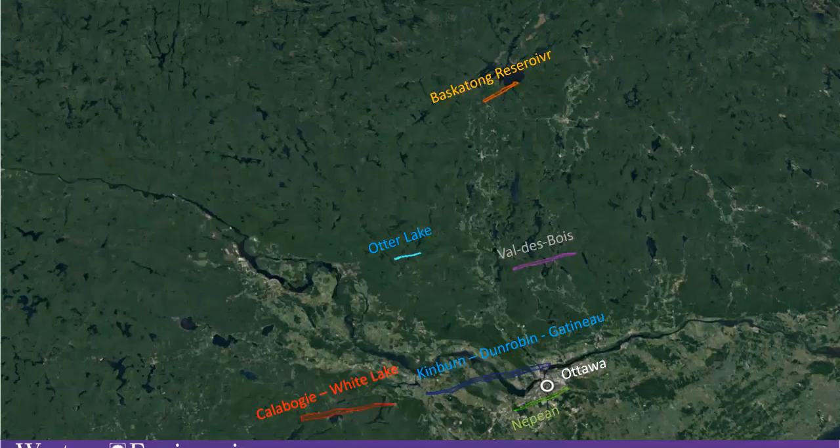So here is a brief summary of the events. On September 21st, the Calabogie to White Lake tornado was not confirmed immediately. From a Northern Tornadoes Project ground survey, we believed it was likely that the tornado touched down. It was confirmed on September...

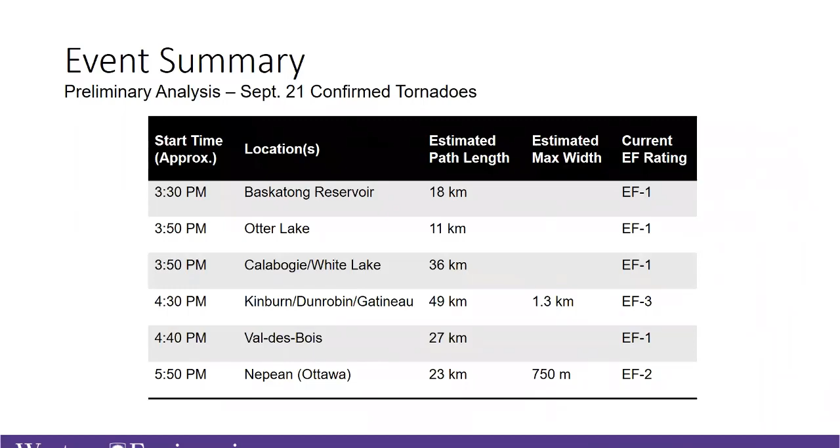I'll now go over some of the meteorological details that have been provided to me courtesy of Leslie Elliott, a meteorologist on this project. Here are some of the meteorological conditions surrounding the event. From the Upper Air Storm Prediction Center mesoanalysis, there was ridging approaching upper troughs and upper level jets causing a favorable area for enhanced lift.

Additionally, the Weather Prediction Center tracked low pressure throughout northeast Ontario, resulting in warm, moist, southerly surface flow for most of southern Ontario and southern portions of Quebec. Behind the warm front, by 5 p.m. local time, the cold front moved through eastern Ontario and southern Quebec. These conditions created lift mechanisms.

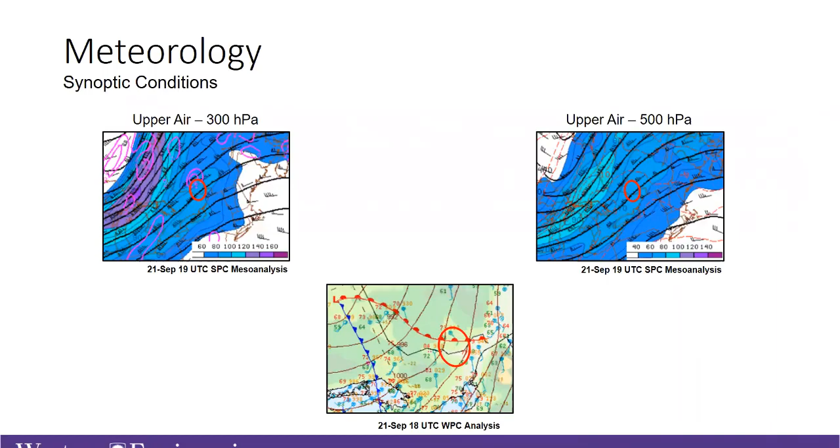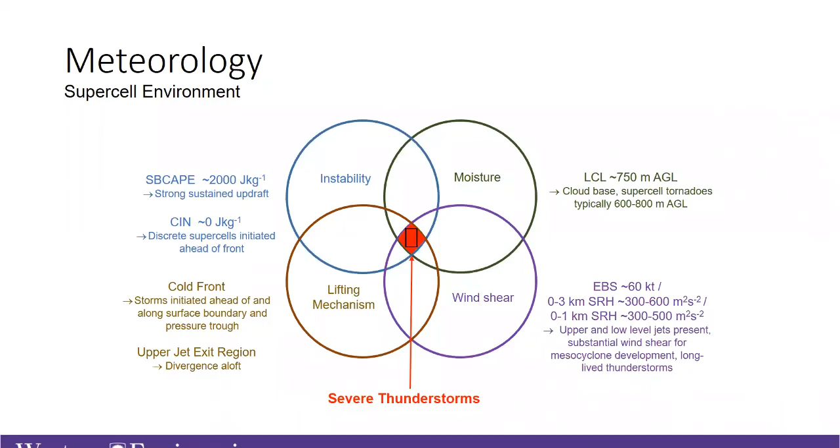So there are four main ingredients to a strong supercell environment. These ingredients, as seen in the figure, are instability, moisture, lifting mechanisms, and wind shear. As described in the previous slide, there were great lift mechanisms. The instabilities and wind shears were remarkably high that day and higher than expected. These conditions created ideal circumstances for the creation of supercells.

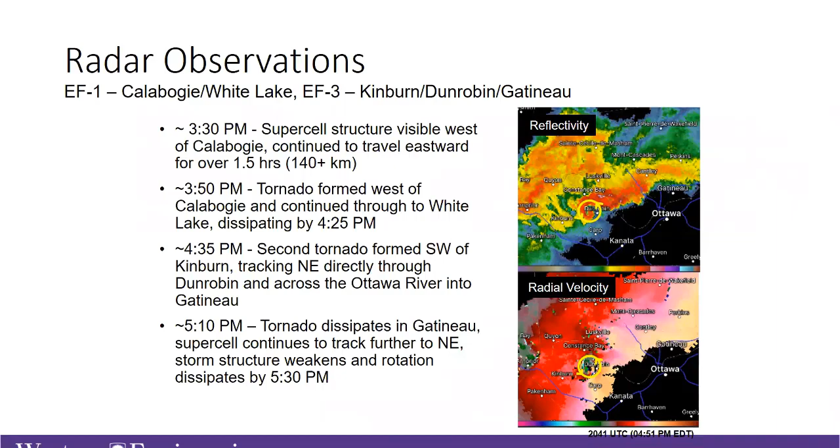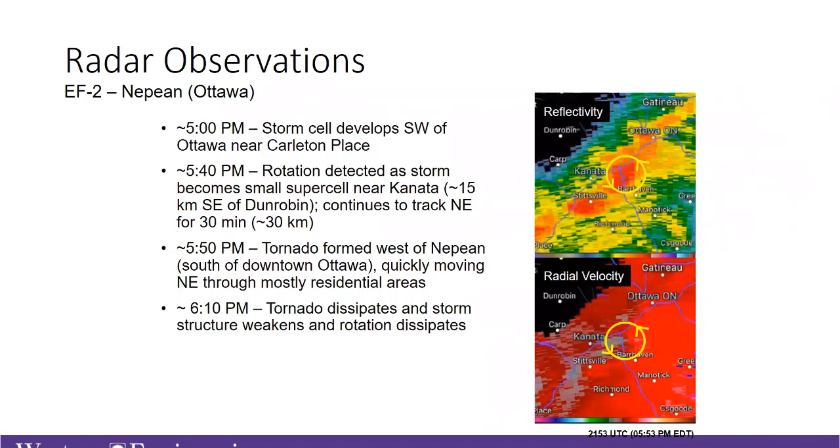The second tornado formed southwest of Kinburn and tracked northeastward across the Ottawa River into Gatineau, finally dissipating in Quebec. The Nepean system occurred around 5 p.m. The rotation was detected as the storm became a small supercell and tracked northeast for 30 minutes. The tornado formed west of Nepean and quickly moved northeast through the mostly residential areas and dissipated around 6:10.

So Environment Canada forecasters issued warnings of potential severe weather prior to the event. This included special weather statements and upgrading to a tornado warning throughout the day. Supercell tracks were followed through eastern Ontario and southern Quebec. The storms lasted from 3:30 to 6:10 p.m. There were over 23 people injured, with 5 in critical condition, and 2,000 plus dwellings were affected. Significant damage to electrical infrastructure resulted in 261,000 people losing power.

The damage experienced in Ottawa is some of the worst experienced in recent history. City officials compared the tornadoes to the 1998 ice storms that caused 5 million people to lose power and cost $1.1 billion in damages. From our personal experiences traveling to the area, many hotels and businesses were without food or power, and traffic lights were also without power throughout the Ottawa area.

Although there has not been an officially recorded number of insurance claims, the provincial government has made $2.7 million available for victims, and the Red Cross has provided an additional $1 million for temporary assistance in the form of shelter and food. Following the storm, there were 16 calls of people being trapped in their homes or in vehicles.

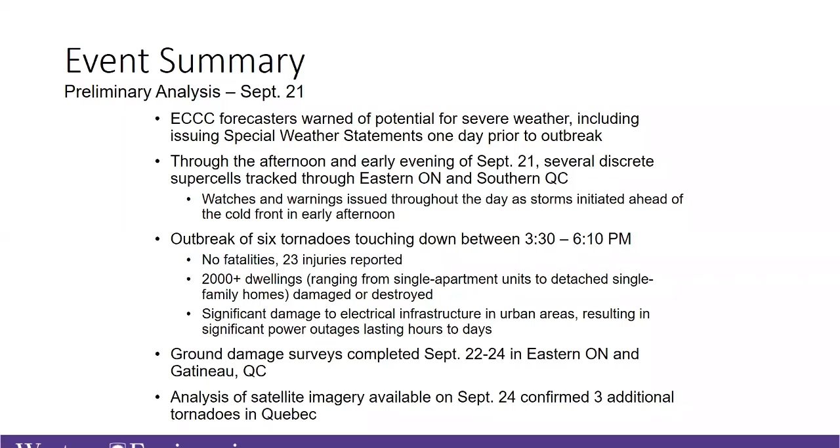Ground surveys were conducted in the area from September 22nd to 24th in Eastern Ontario and Gatineau. Additional analysis of the satellite imagery was available on September 24th to confirm 3 additional tornadoes. So one of the purposes of our damage survey is to estimate the wind speeds. For those unfamiliar, this process is unlike hurricanes. Tornado wind speeds are determined forensically.

In a hurricane, equipment can be set up prior to the event, and this is able to measure the wind speeds for the event. For a tornado, this is not done due to the difficulties determining where and when the tornado will hit, and the determination of wind speed is done following the event. Following this event, we examine the damage to estimate the wind speed and categorize the damage. This is done using the EF scale. This scale gives damage indicators and the respective degrees of damage. This allows an estimation of wind speeds.

For this damage survey, the Northern Tornadoes Project sent two teams. One team consisted of meteorologist Dave Sills and Leslie Elliott. David Sills works for Environment Canada, and Leslie Elliott is a meteorologist working for Western, embedded in Environment Canada. Aaron and I are both engineers from Western. We were also joined by a team from the Ontario Storm Prediction Center, consisting of 5 members, and the Quebec Storm Prediction Center, with a team of 3.

The Environment Canada teams focused on determining the track length and width of the storm. The Ontario team mostly focused on the Ontario portion, and the Quebec team observed portions of the damage in Ontario before examining the eastern bounds of the storm.

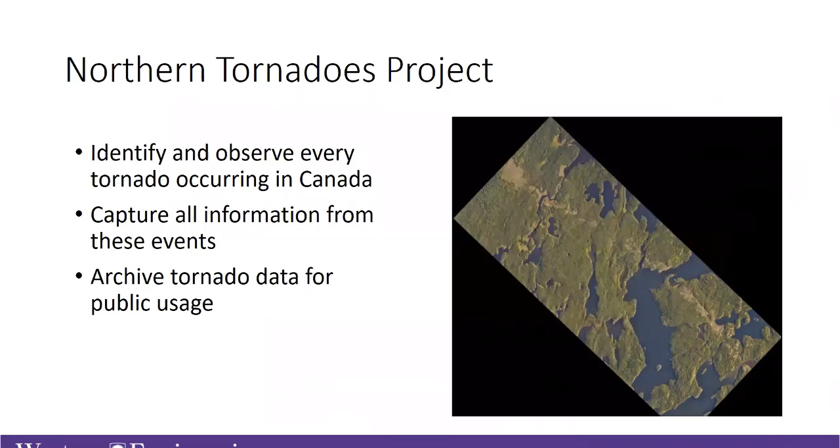So currently only the ground survey has been performed for the Ottawa tornadoes. The aerial surveys have been delayed due to weather conditions and aircraft availability. The Ontario ground surveys were conducted September 22nd to 24th. This survey was to estimate the bounds of the tornado and assist in determining the areas for the aerial survey, determined by finding the thresholds of damage from the storm.

One of the objectives of the ground survey is to capture everything that can be seen from the ground. Ideally, this means going door to door and examining every single structure affected by the storm, including noting structures that were not damaged. This needs to be done as soon as possible following the event due to the immediate cleanup that follows.

Ground surveys also allow us to talk to residents and clarify details, such as determining the context of damage. Sometimes these are just repairs on a building that were being undertaken, or determining if there were wide openings in the building, such as a garage door left open or windows.

With the ground survey, we want the finer details of the damage as well, including examining the connections that would fail and the quality of construction. Where roofs have come off, these connections are used to determine the strength of the building. Small details on buildings allow us to determine if the construction quality was poor, average, or well constructed.

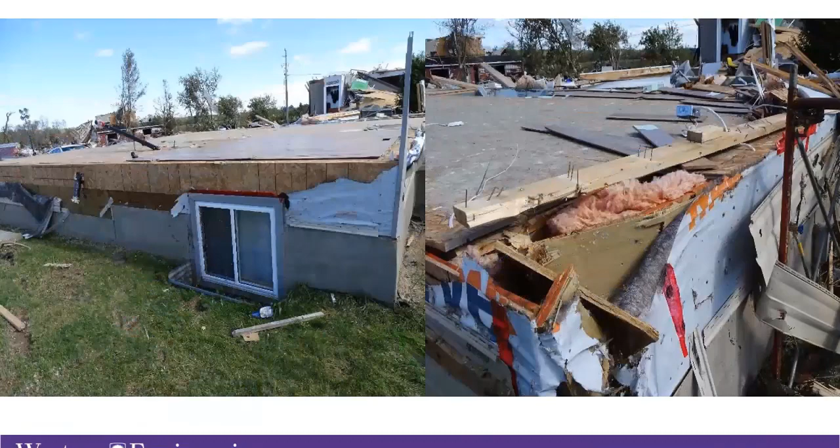Some of the vinyl finishing of the flooring was still present on the building. This is not a good sign for the construction of the building. It appears as though the walls were held by a few nails. Overall, this construction was lacking.

The walls appear to have come down completely with the poor nailing, and parts of the vinyl siding are present on these walls. If we examine the trees in the background, we'll notice these trees still have leaves and branches. You can see parts of the vinyl siding hanging in these trees. Many of these trees are still standing after the storm.

The nails here do meet the code requirements to go through the plate, subfloor, and joist. However, compared to the strength of the minimum requirements for anchor foundations, the nails have roughly up to a tenth of the uplift resistance and a third of the shear. The wall sheathing here does not span across the bottom plate joint, which further supports that this building is a below average to average structure.

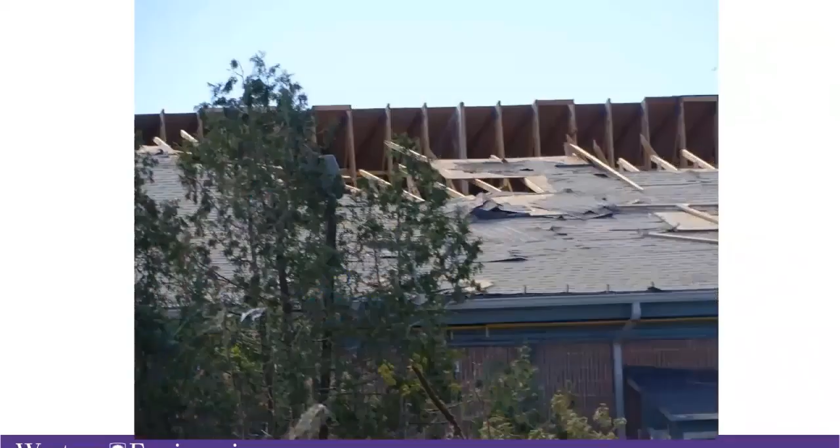Nearby, the church on the main street has experienced damage to the top of the roof. The top peak of the church has been damaged. It's a stranger case since most of the shingles are still intact, however there is significant sheathing damage and damage to the trusses.

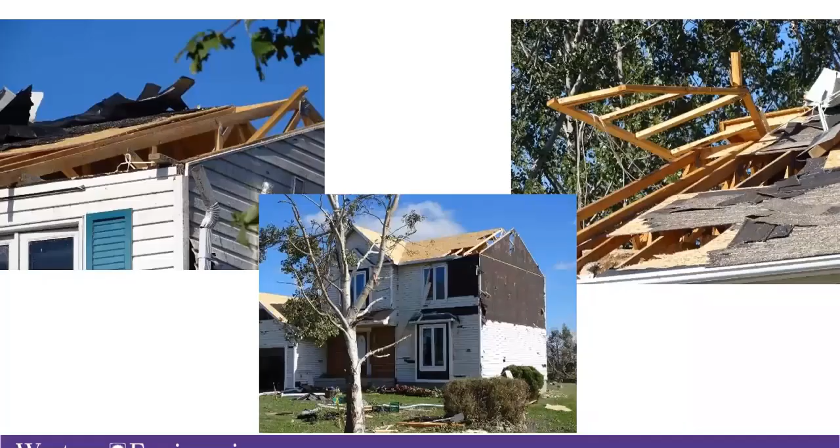I'll move further downwind now to the observations found towards the back end of this community, circled here. Here are three different pictures of houses in the area losing sheathing. These images show three different homes with high degrees of damage. The top right image shows a truss coming off the roof. There were less debris effects on these buildings, but more significant shingle and siding losses.

This image is a particularly interesting building case. From the street, this building only appeared to lose shingles on the top roof. However, speaking with the homeowners, this building has been shifted off of its foundation. It will have to be rebuilt since it's not considered stable according to building inspectors. It's difficult to see this damage from the outside.

I'll be passing off the presentation to Aaron now to talk about our findings in Gatineau and Nepean.

Thanks, Emilio. So Gatineau, Quebec was another severely damaged location from the outbreak that was surveyed by our team. This damage was caused by the same tornado that swept through Dunrobin, which then crossed the Ottawa River and hit Quebec. This map shows the approximate path of the tornado in red, with Dunrobin in the center of the path and the Quebec portion at the east end in the black circle.

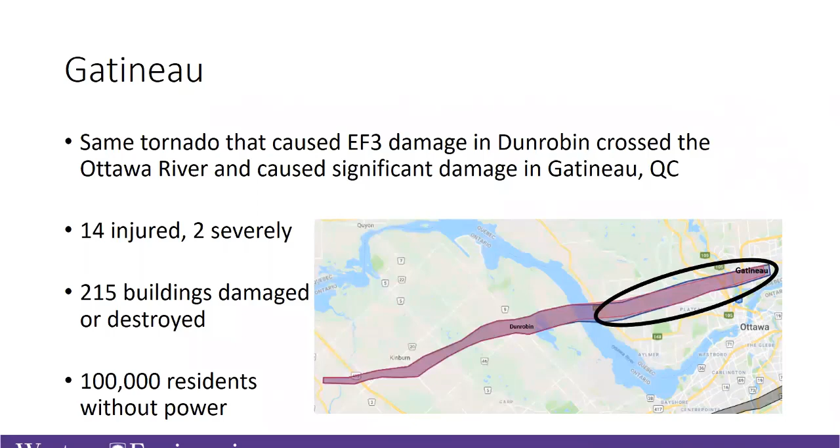Thankfully, much of that circled section was rural land. However, the Mont-Bleu neighborhood was hit hard at the east end of the circled section, which is where we surveyed. There were no casualties, however news sources stated 14 people in this area were injured from the storm, with 2 in critical condition. 215 buildings were damaged or destroyed, with hundreds more affected. There were also up to 100,000 residents on the Quebec side of the border without power for varying lengths of time.

Our team estimated that this was low EF3 damage, with maximum wind speeds around 240 kilometers an hour, which is in general agreement with the numbers Environment Canada gave. On the following slides, I'll take you through the various damage we observed in the area.

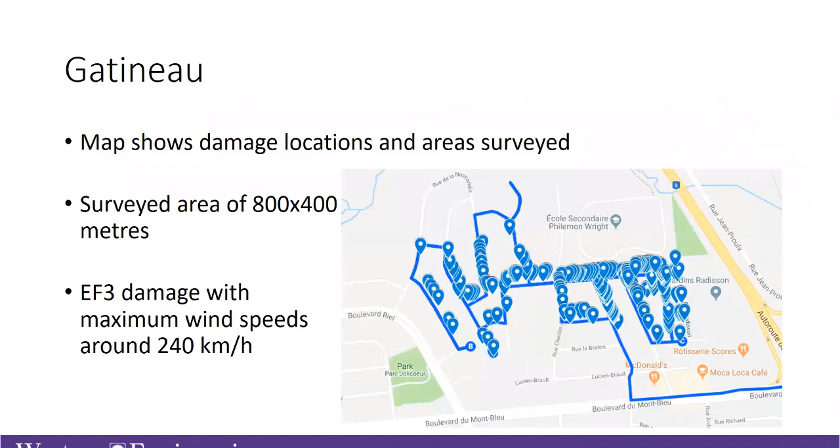The most common type of structure damaged in the area was low-rise apartment buildings. Before I go over each area of damage and building type, I'll go back to this map and highlight the area we're looking at with a red box to make the presentation easier to follow.

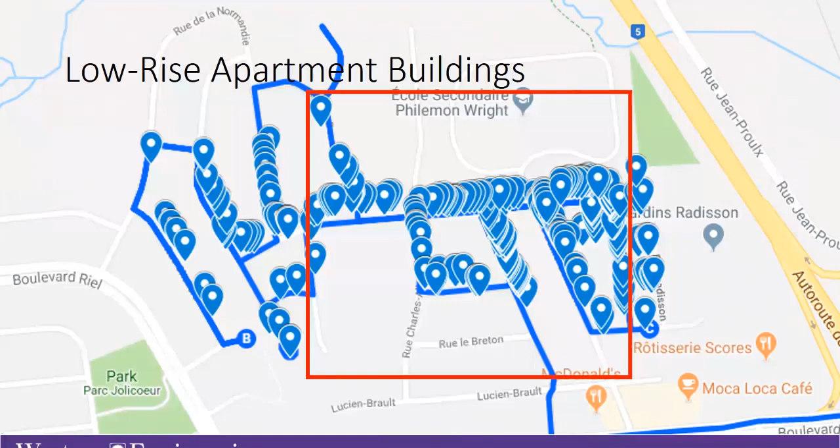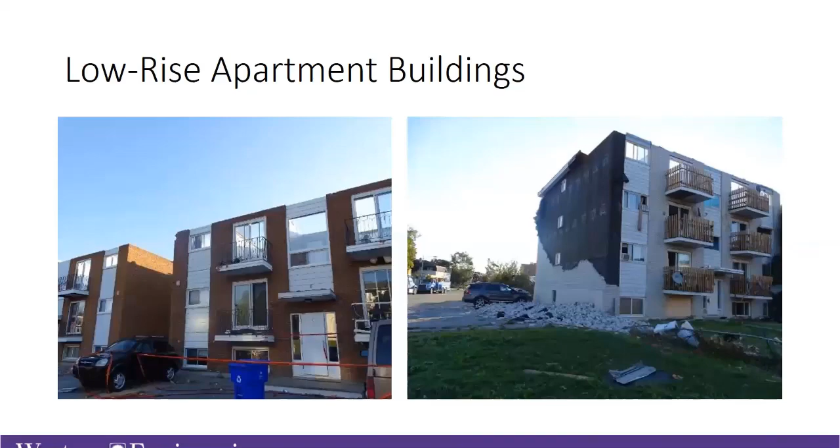removed. Although this is less obvious with photos of flat roof structures from the ground, you can clearly see that the roofs are missing when looking through the windows on the top floor of the structures. Once removed, these roofs break apart and turn into dangerous projectiles in the debris field, damaging more structures downwind. The fact that these structures were located at the bottom of a hill could have played a role relating to debris impacts as well.

Many structures also had external walls collapse in their top floors. This mostly happened to corner walls on the windward side of buildings, like in the photo on the left. The photo on the right shows a building that actually had its entire back wall of the upper floor removed on the leeward east-facing side of the structure. You can tell we're looking at the leeward side by noticing the mostly intact windows.

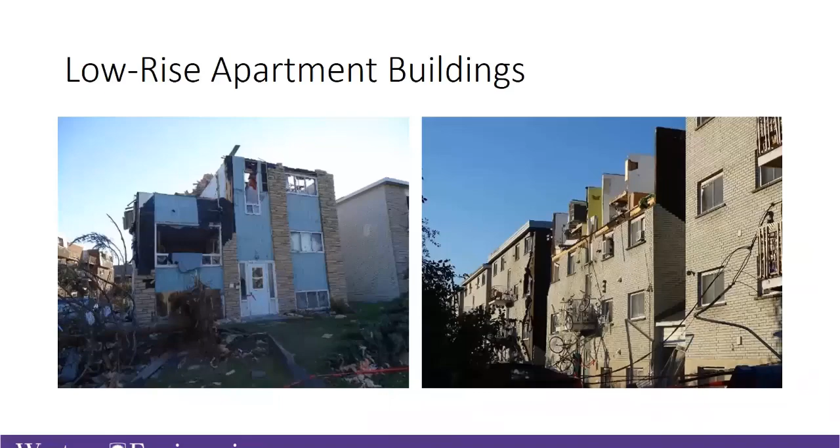This is a sign of how strong the winds were, or perhaps faulty construction, if this wall was not properly secured to the rest of the structure. This type of damage was the most severe in the area and was a main factor towards the decision of an EF3 tornado.

This is not surprising, as much past research has shown hip roofs to be stronger than other roof types due to their aerodynamic shape and roof-to-wall connections on all four sides of the structure, as opposed to gable roofs, which only have roof-to-wall connections on two sides of the structure and not their gable ends. More research needs to be done on how roofs with odd or complex shapes fail in severe wind events.

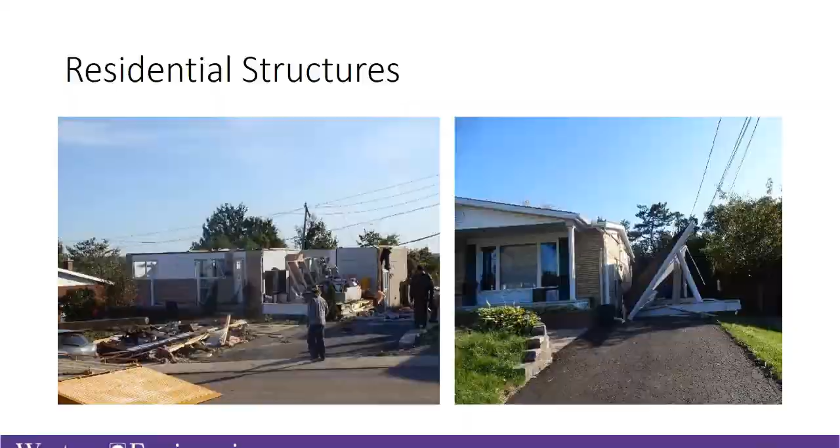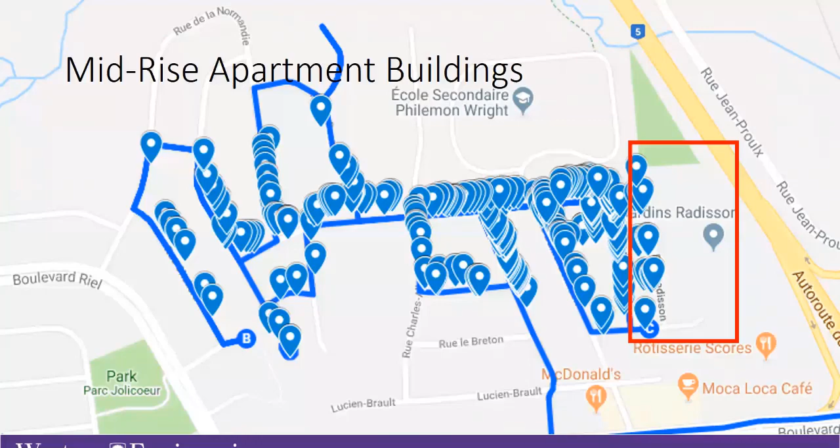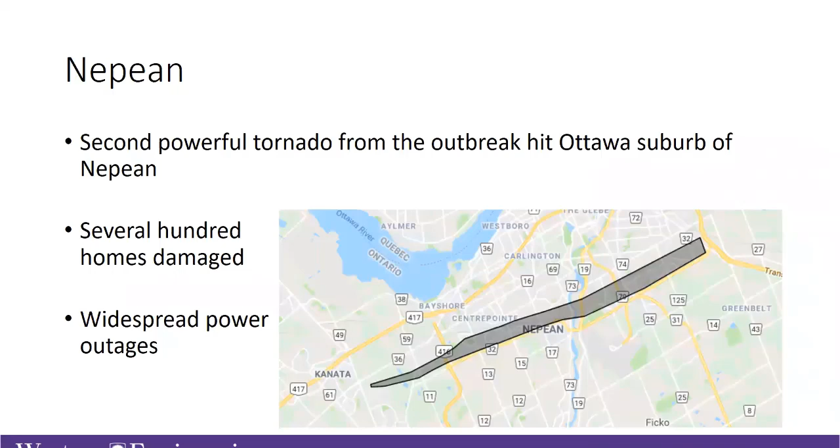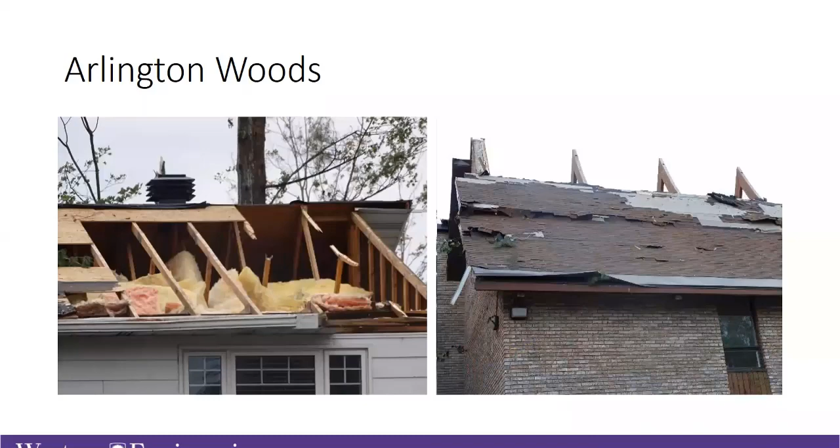Many of the shingles are missing, as well as the upper portions of the sheathing. Upon closer inspection, however, it doesn't seem to be a very well-built roof. The roof frame is spaced rather far apart, limiting the hold-down force available to the sheathing. Failures such as these, although they may seem minor compared to the loss of an entire roof, will often lead to significant financial loss and sometimes the demolition of the building due to water and wind entering the structure and ruining the contents.

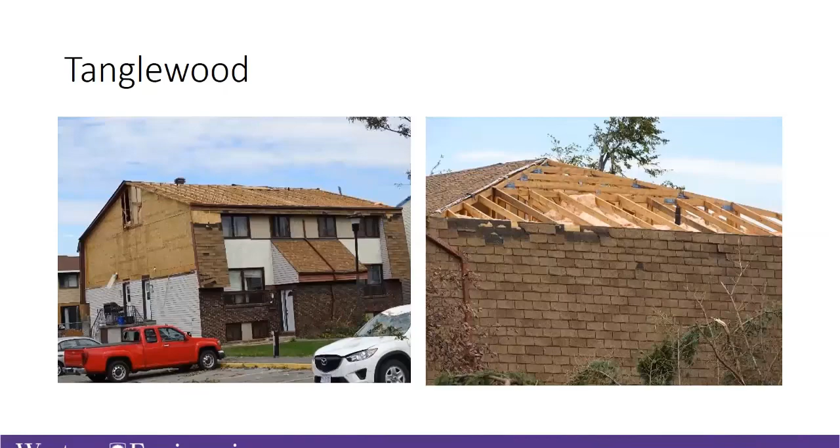The damage was severe enough that the power had to be rerouted from other stations and wasn't restored to most houses, businesses, and traffic signals of Ottawa-Gatineau for 3 days. The repairs to this station itself are expected to take weeks. There have been thoughts towards burying or enclosing these stations to protect them from the elements, but this is both expensive and more difficult to maintain, as well as being a fire hazard.

Although it appeared that the damage track ended at the east end of Tanglewood, ground surveys by other members of the Northern Tornadoes Project and satellite imagery suggest that the tornado went quite a bit further. The damage in this area was much less significant, although given more time, it would have been useful to survey this area more thoroughly on the ground. Our current estimate is that the path ends near Highway 417 in the upper right corner of the maps. This will be investigated further by aerial imagery in the near future.

I will now pass it back to Emilio to give us some final thoughts. So from the damage survey, we were able to determine the main storm tracks in Nepean and find some of the thresholds for the Kinburn, Dunrobin, and Gatineau storms. This information helped with determining our aerial survey tracks.

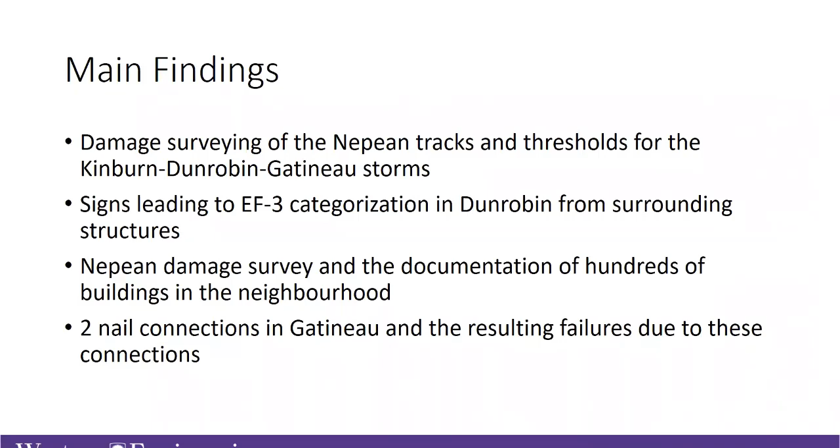In Gatineau, we observed many connections with only 2 nails. The neighborhood had many low-rise structures affected by the storm.

As students working on the beginning portions of this project, we try to take this as a learning experience going forward. There were many challenges with this damage survey due to site access. This included large portions of Dunrobin due to gas leaks and electric wires, transmission areas in Nepean due to live wires, and the apartment buildings in Gatineau due to debris and other hazards. Some of these areas would have been interesting case studies, but the lack of accessibility made observing damage very challenging.

There were many issues getting to these locations due to the power failures in Ottawa, and transportation issues getting to the site. Some of these issues are to be expected with damage surveys. Going into this region, the power was out in the area, causing the search for accommodations to be difficult.

As stated previously, there are many issues with drone flying in the area. During the survey, there were different opinions on how to best utilize our time following the event. With such a large-scale event, there are many structures affected that can be documented. Additionally, in this survey, the damage tracks were very long, extending many kilometers, leading to long searches in determining the track lengths. It was difficult to be thorough due to these long tracks when going through with a door-to-door approach surveying houses.

To improve this, better familiarity with the app may help, along with increased time and additional planning. There were also multiple different parties involved in the surveys, and coordination of teams was at times difficult. Due to communication towers being knocked out in the area, reception was not always ideal, causing issues with contacting other groups.

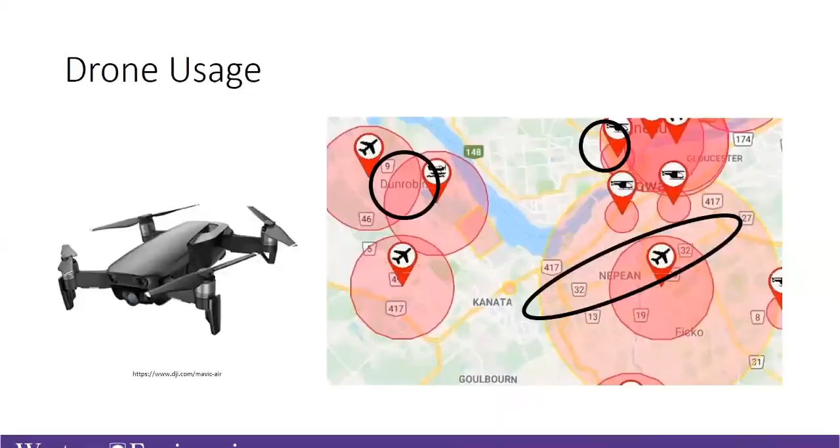Another question: you had some pictures, I think it was Aaron, of trusses with missing toenails, and you referred back to the Angus tornado paper, where that was a recurring theme as well, missing toenails. I'm wondering if you have any judgment on the proportion of trusses you identified that had missing nails. And another question - some of these look like potentially older examples. Were the code requirements consistent throughout the construction era of all these buildings?

That's a great question. Virtually all of the trusses we had at maximum 2 nails - that's what they were assigned. Now the ones with 1 are definitely some kind of error, but the ones with 2, we know 3 nails are stronger, but I can't say for certain that at the time these structures were built, 2 nails may have been okay. I don't know if the provisions are slightly different for Quebec - I know Quebec adopted the NBCC around 2000. So structures built nowadays should all have 3 toenails, but having only 2 greatly reduces the strength, and a lot of the structures we saw only had 2. We saw almost no roof trusses with 3 nails.

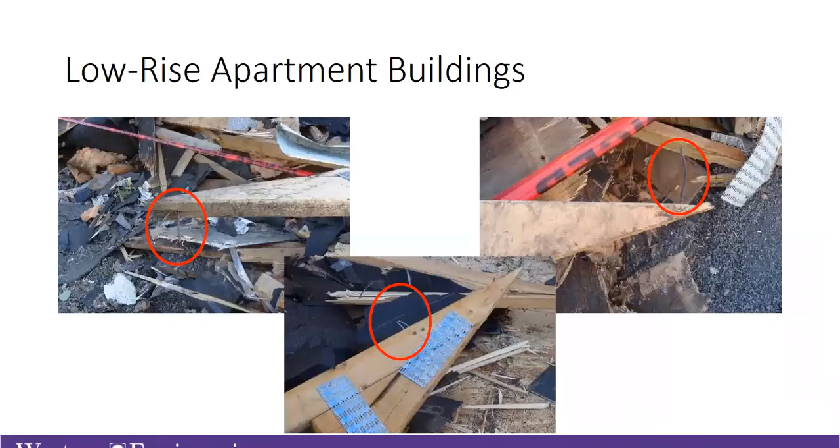Okay, interesting, thank you. A question for Emilio - you had that example of the house in Dunrobin that appeared from the outside to have relatively minor damage, just a missing roof covering, but the entire building was reported as shifted off the foundation. Do you have any sense of the anchoring used in this building and the era of construction?

I wasn't able to get inside the building to check any of that, and from the outside we were only accessing the area from the street, so it was difficult to tell the anchoring for the building and how that would have caused the failure. My best guess would be that the anchoring wouldn't be particularly strong based on the surrounding buildings, and it might be more a result of less anchorage into the building, or none present at all.

Yeah, okay. One of the first questions we had online here from Zohad relates to what is the dominant driver of damage during a tornado event - is it high central suction or higher tangential wind speed at the core wall? So I suppose uplift versus shear lateral loads. What's your thoughts on that?

For this storm, I believe it was more the high central suctions. This is due to the fact that most of the debris was relatively close to the building it had come from - I don't think any of the walls we found were more than 10 to 20 meters away. If it was higher tangential winds, I would expect these components to be blown much further away from the building due to the high speed being the causing factor.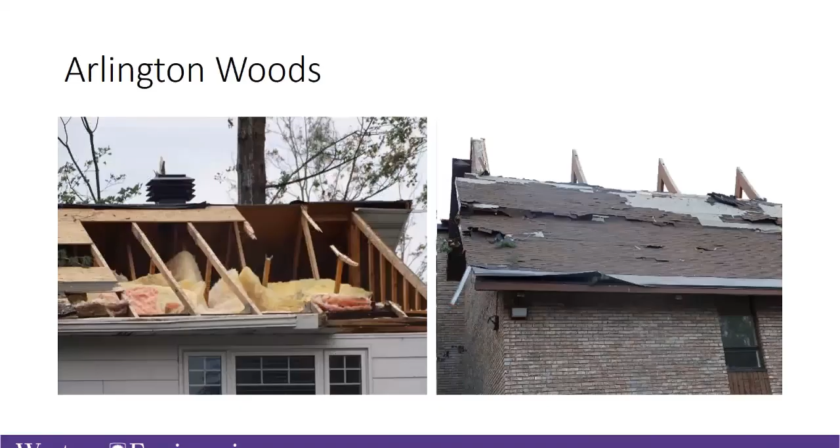Here, I can start it off. Okay. So in my past experience with the Angus tornado, in that storm there were heavy signs of degrees of damage being out of order. I'm showing on the screen now the damage indicators in the current EF scale. I'll just give some initial thoughts and then pass it back to Aaron.

So one of the issues in Angus is we had houses there that had exterior walls coming out when the roof of the house was still on. That shows that's an out of sequence event, as typically the roof comes off first and then we'll have the walls come out. And that showed inadequate connections from the wall to the rest of the building. Typically, we want to see failures of the shingles coming off, sheathing, and then roof failures, then walls, and then complete destruction of the building.

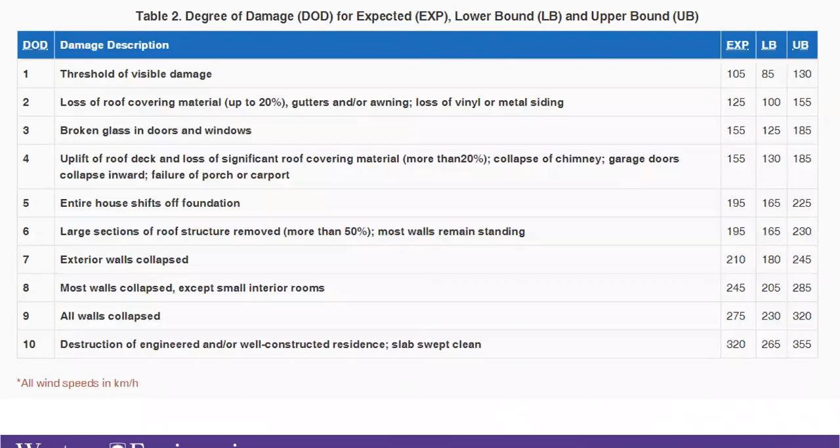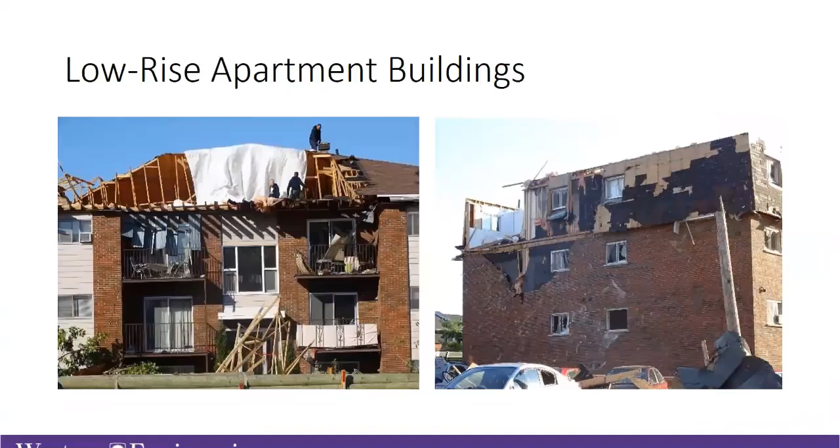Yeah, so just to add on to that a little bit, because I actually did mention that during my part as well. Sorry about that. Just flip to the slide quickly. Yeah, so I talked about it here on this structure, but as a better example, I'll flip to here. So this building would be an example of that.

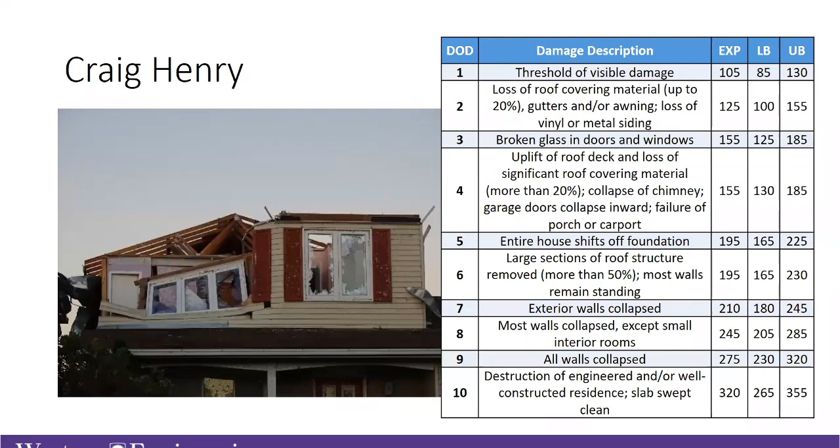But when I say in order, I mean in order of the degrees of damage for a certain damage indicator. So, for example, I'm showing the damage indicator of wood frame houses here that Emilio was just looking at. We'd first expect to see some loss of roof covering, and then some broken windows and uplift of roof deck, and then the loss of roof structure.